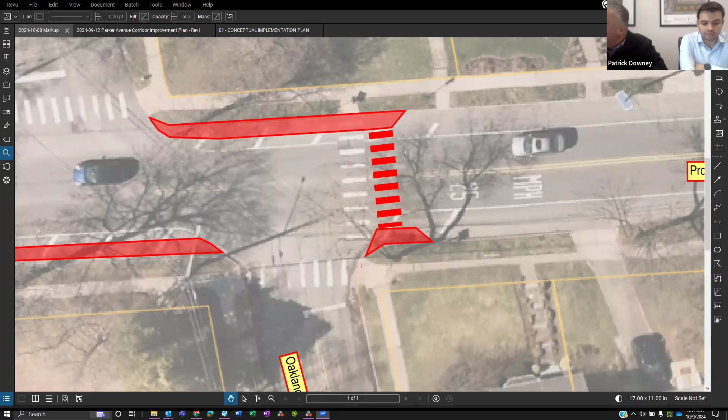John, can I ask you another question about Prospect, since you've done studies on it? At these peak times, am I correct to say that volume of traffic is more of an issue than speeding? Speeds are probably a touch above the speed limit, but there's a lot of cross streets, a lot of turning into and out of, and significant pedestrian activity, which tends to help with driver speed.

Volume is high. It's probably, do we have notes here? It's over 12,000 daily. We keep talking about this because we only have so much infrastructure, and the population in both towns is growing.

So people are bypassing Valley Street and coming on Prospect. Yeah, there's tremendous traffic using Prospect. So it's not as local a road as we want it to be, as it used to be. That's a pretty significant volume, 12,000 ADT, average daily traffic. It's huge for a road like this.

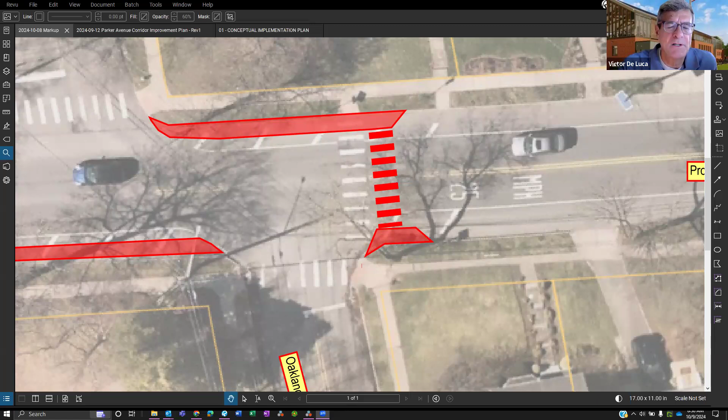But it is a north-south connector. That's right, it connects South Orange with Union, and goes right through Maplewood.

Paul, Patrick, and John, do you want to say anything else about Prospect, on the entire stretch, before we have comments from folks? Yeah, I do, just want to mention one thing.

We did apply for a municipal aid grant for Prospect. We're still waiting for the state to get back to us, but we anticipate getting the grant. If that's the case, we'd be looking at repaving the entirety of Prospect Street, which would clean the slate for any type of design, bike lanes, or pedestrian safety improvements we have in mind. That would basically clean the corridor up so that any new striping would really pop and be more effective.

And when is that? That would be 2026 probably. Probably 2026, yes. Okay, John or Patrick, anything else? No, Vic, I'd be happy to hear from the residents.

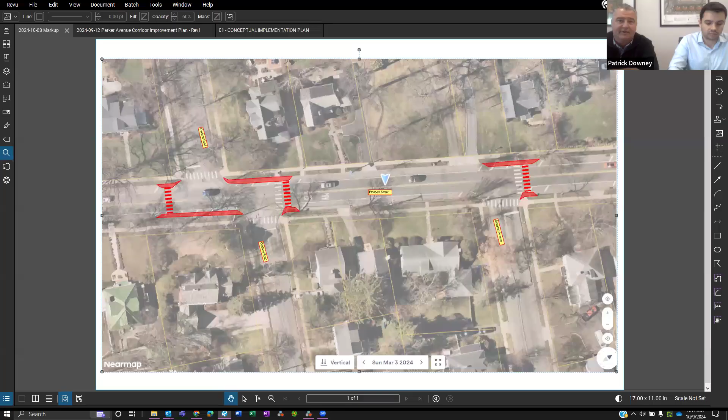If anyone would like to speak about Prospect, and can you get rid of the share, feel free. Hi, this is Vicky speaking.

Vicky Arlene. Quick question: those accident studies that were done on Prospect, were they just since the law changed about stopping for pedestrians in the crosswalk, or did they go beyond that? Because in the case of the children and other people, the assumption is that cars are supposed to stop in a crosswalk. I'm wondering if the study of accidents is all affected by the new law, or if it's just from before the new law, or both, or whatever? Right, the crash history we requested and received from the police department was over 5 years from today, so it includes...

I guess in those 5 years it was always stop for pedestrians, if I recall correctly, but it's not just a 1 year snapshot - we go back at least 3 years, I like to go back 5 years to see that. Now, remember, when we request crash history, it's only crashes that are recorded, reported, etc. So there could be activity happening that doesn't rise to the level of crash reports that the police would have hands on. But that's what we found, and that's what we have to utilize in our justification.

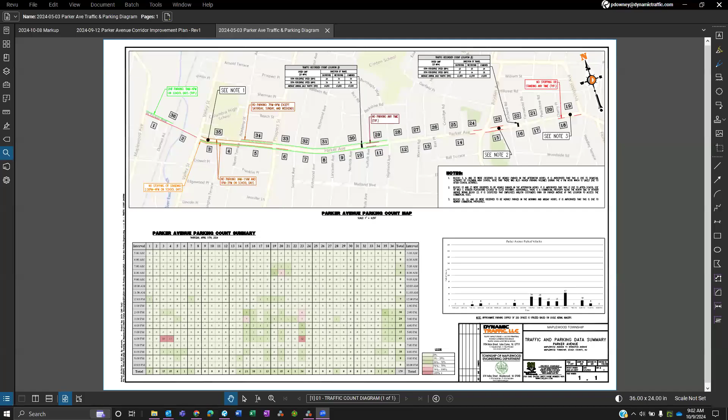Can we pull that plan up, gentlemen? Do you want to just describe the plan? Yep, coming up. Before hopping to the plan, we're just going to walk through some of the background information that was collected.

As was alluded to before, we took a holistic approach at Parker Avenue, specifically with regards to how to bring it into compliance with complete streets policies, and how to make it safer for cyclists, pedestrians, and motorists. One of the key changes being evaluated was the conversion of existing on-street parking to bike lanes. The road is very narrow, too narrow to accommodate both features, so it really is an either-or.

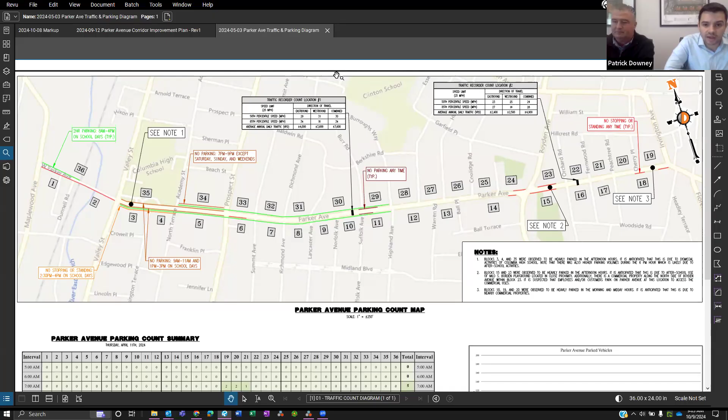We went out and performed parking counts on a number of days, and looked at existing parking regulations. We broke the entire road up into numbered blocks, over 30 of them, and summarized their parking utilization in this table, with green representing low utilization and red representing high utilization. As you can see, while on-street parking is legal in most locations, it's very underutilized. Two main exceptions were at the west end at Columbia High School and at the east end at Milo Borden Park and Playground, where there were a couple of afternoon spikes in parking activity.

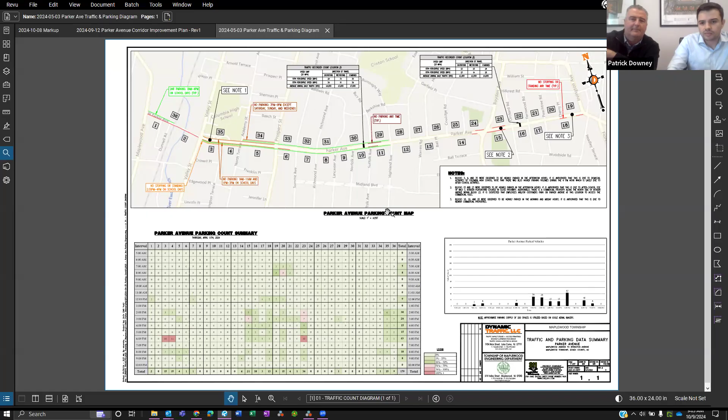Just to show the magnitude, this is essentially the number of parked vehicles over time, with about 200 spaces available in total. You can see the most at any time was just over 40, so only about 20% utilization at the highest time. Based on Parker's location as one of the more continuous, longer streets, and based on the underutilization of parking, this seemed like a good candidate for potential bike lane improvements.

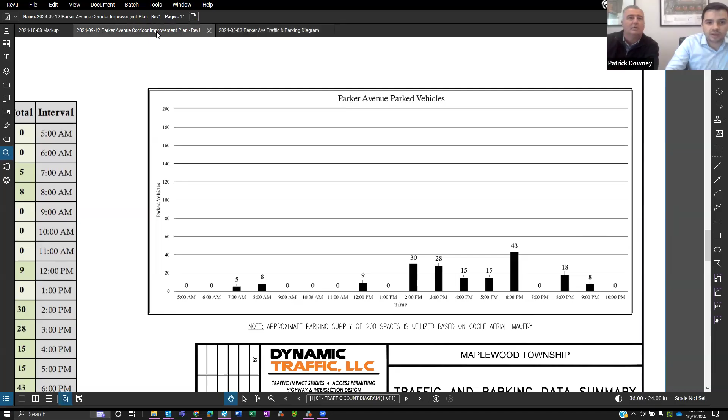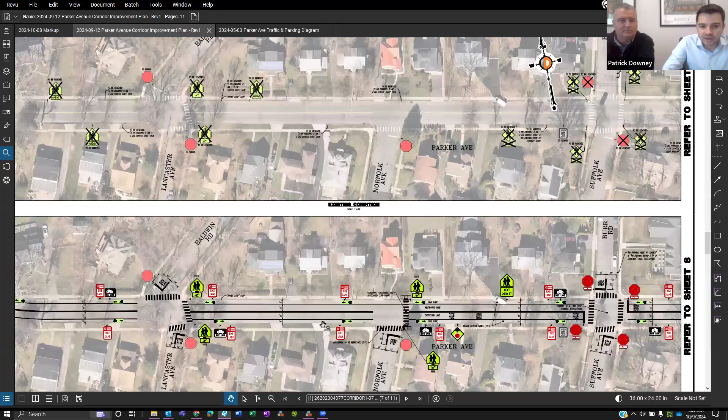What you can see at the bottom is new bike lanes installed with a new stripe separating them, narrowing the lanes down to 11 feet to provide some traffic calming benefit. We're also upgrading the existing LED blinking border signs, which we discussed recently, to new RRFBs—rapid rectangular flashing beacons—and refreshing crosswalk striping, stop bars, and adding stop word markings to make intersections highly visible to motorists.

We're adding crosswalks at intersections where they're missing. In the middle of the screen at Norfolk Avenue, there's a missing crosswalk which would be added. At several intersections we performed individual safety evaluations and looked at potential all-way stop inclusions. This one on the right side of your screen, Burr Road and Suffolk Avenue, was one that rose to the level of warranting an all-way stop. It's a good location within the block too—roughly midway in the span between the nearest traffic signals—so it helps break up the monotony of that long uninterrupted stretch.

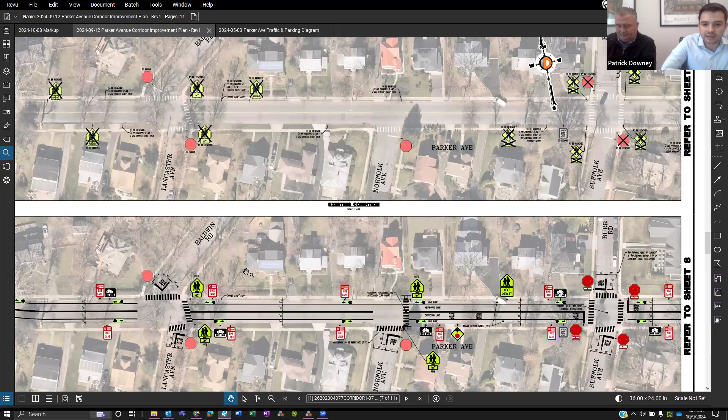So while it's not there for traffic calming purposes, it's warranted in its own right, though it does have some ancillary traffic calming benefits. This gives you a good snapshot of the improvements we're looking to do across the whole run.

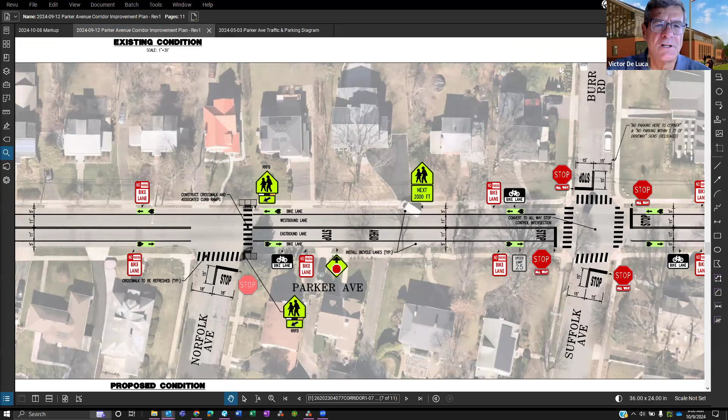So we're not going to go through the whole corridor unless you want us to. Do I, or do you want us to, Mayor, talk about the area around Boyden and Parker? We have the park there and we do get a lot of parking. Yep, what is your plan there? Yep, we'll flip to it—give us a second, it's a big file, so bear with us, I'm sorry.

In this one location, this is where we identified some of the most utilized parking. There's also a retail business on the north side of this block between Boyden and Orchard, so this was one location that deserved a little special attention. I'll move from west to east: we have the signalized intersection with Boyden Avenue, where there are special treatments for how to carry bike lanes through signalized intersections to make sure they're visible.

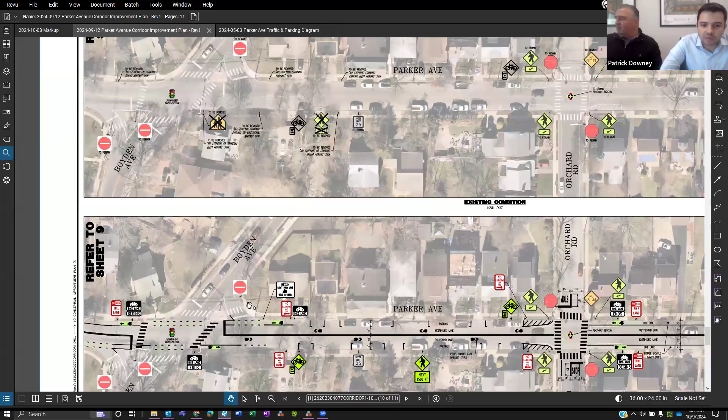You see dashed green bike lane extension markings in both directions. To the east of that intersection, we thought this was a location where on-street parking was important and needed to be maintained, both for the park and for the business. So for that reason, in this one block only, we'll be converting the bike lanes back down to shared lanes—what we refer to as sharrow markings, which are bike lane symbols placed within travel lanes indicating a shared space.

Vehicles need to share that lane with the bikes. Continuing west to east, once you get to Orchard Road, that was another intersection that had some historical issues.

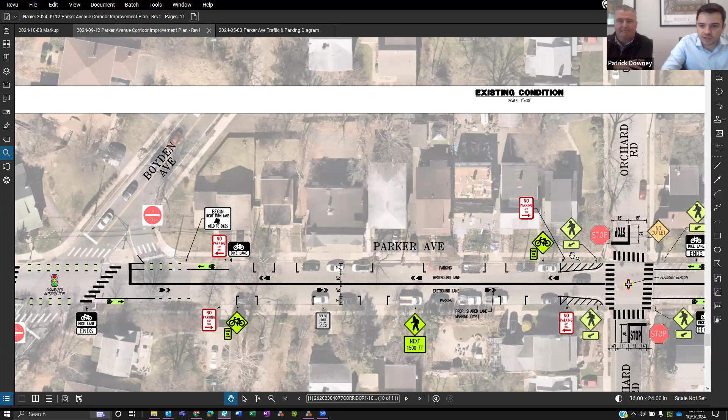There's an existing overhead beacon. We took a look at sight lines and found that they could be improved there. So we were calling for some daylight striping improvements at the intersection, an upgraded refresh signing and striping package for that intersection.

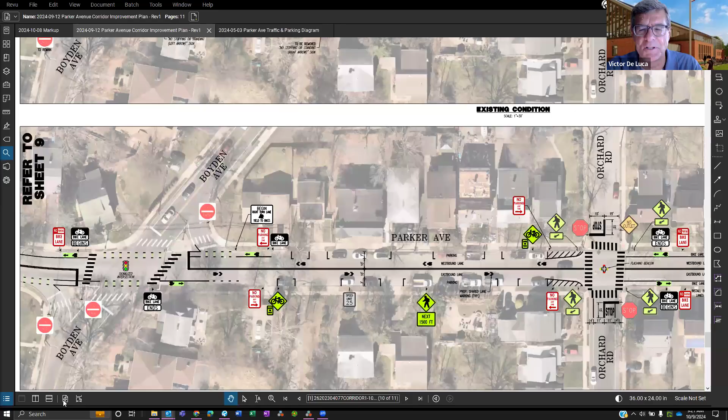Rich? Hi. Okay, I won't compliment you then. I was going to. No, you can do that.

You can do that. After 30 years of being involved at some level looking at this, I'm just stunned and appreciative of this. Just a couple quick comments.

One was mentioned, I think, by the previous speakers. It had to do with the color of the bike lane. They were talking about green, and I was going to make it a question, is what else do you do to make the bike lane look different than the street, and what's in the plans?

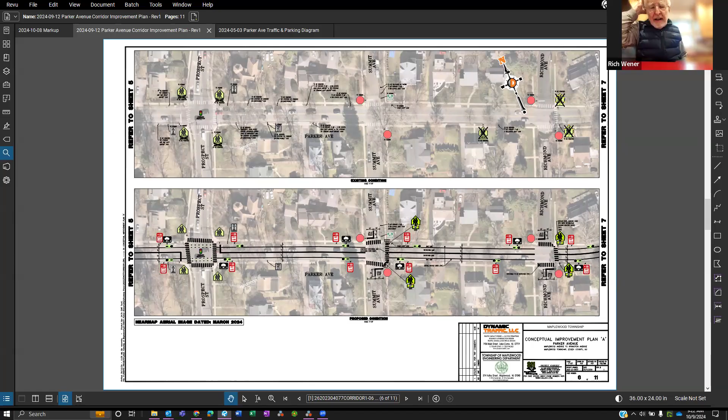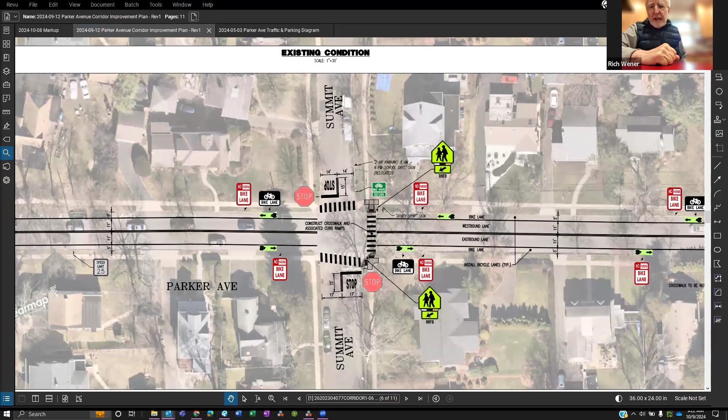Let me just mention a couple other things. I think having these major regular riders comment on this is really useful and great. Obviously, they'll ride anywhere and do. It's the shaky riders that are the key, and that's what you want to really make it feel safe for. I think those are the people we need to be talking to as this gets laid out more. I'm guessing you already have somewhat, but if we could talk to the parent with a couple little kids that are just starting to get around, that's the kind of thing that really makes this work as a large community thing.

The last thing I wanted to say, having a good friend that was hit by a bicycle in Manhattan the other day and is still recovering, I think one of the lessons is that enforcement has to also include enforcement of behavior by the cyclists and not just the drivers. I think cyclists sometimes are more cavalier about crossing a stop sign without stopping when it looks open, and I think there's major risks to pedestrians. I'm majorly pro-cyclist on this, but I think it's a reality that needs to be addressed.

Thank you. Thank you, Rich. Julia?

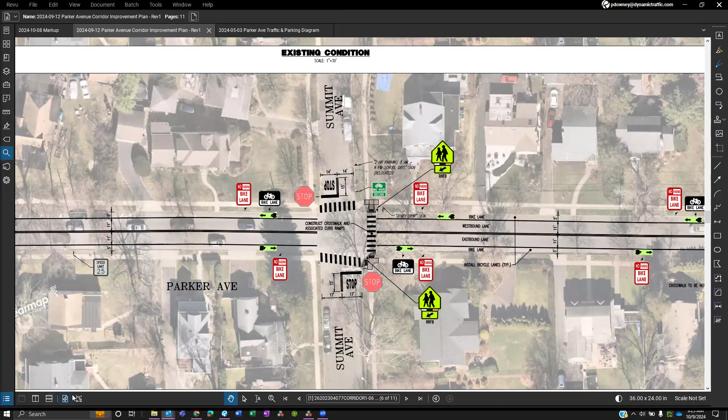Hi, I love to see the green paint here. I want to know if the engineers or administration anticipate that requiring more maintenance than white paint, because South Orange is painting two bike lanes this year and requested to use green paint for safety, but they were concerned about keeping green colored paint on hand and the frequency and expense of repainting. So I just want to make sure the town has a plan to maintain the green paint, and also share with South Orange that it's a good idea to have a consistent look of our bike lanes across the two towns, since we're just starting out with this.

My child goes to Clinton School, and like you're saying, it'll be great to get public feedback from the communities that frequent this area, and the Clinton population. I'm sure we'll have a lot of feedback, in particular on the multi-way stop at Burr. It would be interesting to understand a little better the choice of Burr rather than Burroughs, since Burroughs is the highest point in the road and where there's a crossing guard already stopping cars, and then they'll have to stop again a block later at the 4-way stop. Not to say that's necessarily a bad thing, but just making sure everyone's aware that's the situation, and that Burroughs is the one that leads directly to Clinton School, whereas Burr is more of a side street, not directly leading to the school.

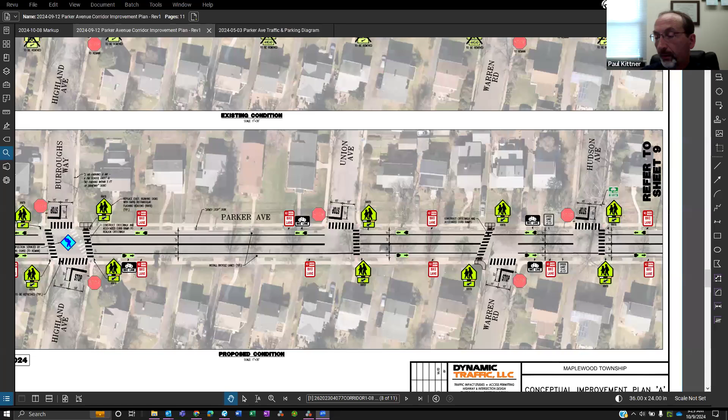Then it would have to get out to bid. So we're talking about this work probably next year at this time, or maybe a little sooner. I think that's fair. The ideal time to do it would be summer, but I don't know if we could commit to that. We're probably looking at the fall.

Right. So to answer your question on staging, could we do one thing first? I think we have to go back and take a look at that—that's the answer. It may be something we can do sooner rather than later, because the four-way stop, if it's warranted, I don't know if we need to wait to have the whole package together. That's something we have to discuss.

Okay, anyone else? Jesse, I want to go back to you for a minute. What do you think the reaction is going to be from any of your neighbors about no parking on Parker?

I would agree with the sentiment before—I think Martin said most people don't park on Parker because it is kind of scary, cars are racing. We had a contractor working here years ago who actually got clipped by a car as he was exiting.

The issue, I think, will be things like FreshDirect trucks and UPS vehicles. We do get deliveries, so I'm not sure where those trucks would go unless standing is allowed, or even like, oops, we forgot the kid's backpack, so we have to run in really quickly and not pull in the driveway. I don't know what kind of rules surround those things, but there's a lot of deliveries and it's a really heavily used street, so that would be my concern. I do support the bike lanes, totally fine with no parking—I think people will adjust.

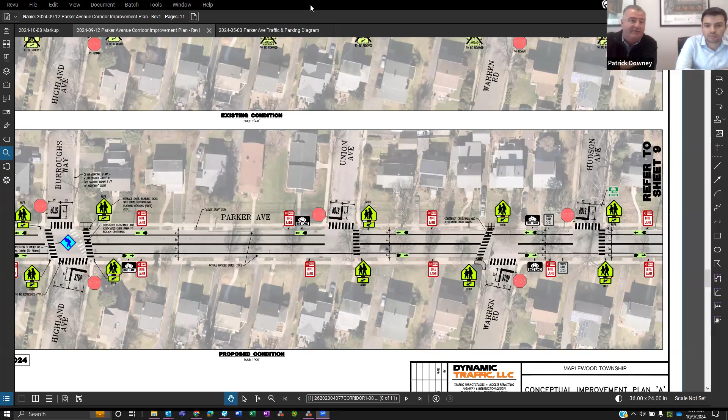Yeah, it comes down to enforcement, how often, and the town's preference, to be honest with you. You're not supposed to stop in that lane, whether you're running in for a pizza or an Amazon box. You're right, there are a lot of cross streets—we figured residents would get used to it and guests would park on the cross streets and walk a couple of homes up. Then it comes down to the town's preference as to how strictly those things want to be enforced.

Okay. Rob, you spoke a lot today—you have anything new to say? I have a question, a follow-up on some of your comments in particular.

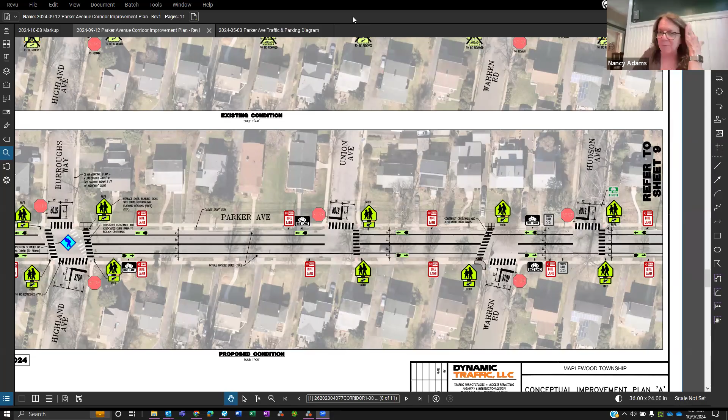It's like over the course of these discussions, on-street parking is referred to as almost precious. The data says it's not very used. To what extent do the town committee and engineering's deliberations consider that people on Parker and Prospect have driveways? How does that factor into how precious we view the parking when there's already off-street parking? It depends on every street. We talk about it with every street. Some streets, like the Hilton neighborhood, have very short driveways, and sometimes more people live in them. So while we want to make complete streets, we can't negate the fact that people have cars. We have to consider everything, and it's not an easy balance.

So just in this picture, you see stacking of cars. If the inside car has to get out, it would require two people to maneuver, as opposed to one person pulling out the first car, parking it on Parker, and then getting in the second car and pulling out. So it creates some difficulties for folks, but generally we try to preserve parking in front of people's homes. This is a major difference.

Cynthia, we haven't heard from you. Hello, so we're on Orchard and Parker. We wouldn't have a bike lane on our block because of the park, the playground, and the business across the street.

I am all for no parking on Parker. I live on Parker. If we have visitors, they can park on a side street, we can figure it out. We have a small driveway.

So my question is, you mentioned this needs to go through multiple stages. Does this need to be approved by the residents on Parker only? Does it work like a percentage? I'm just not sure how that process works.

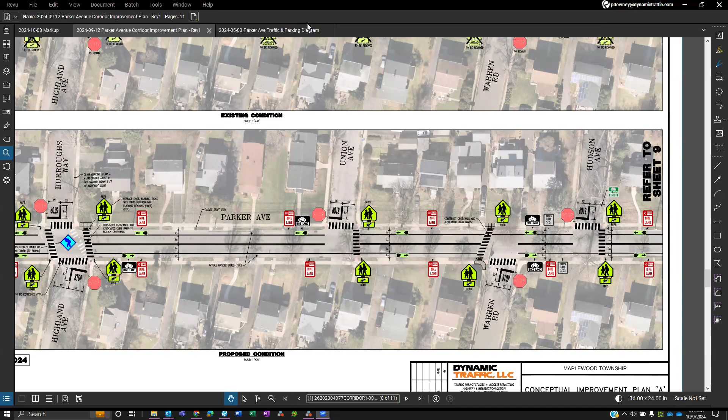Okay, well I do think it's a step in the right direction. I'm excited anytime I see a bike lane, especially now that we have a lot of schools ramping up and getting bike buses going to school. So like I said, I'm hopeful. Thank you.

Jesse, your hand is up, did you want to say anything again? No, sorry, that's all, okay, I didn't mean to raise my hand. Okay.

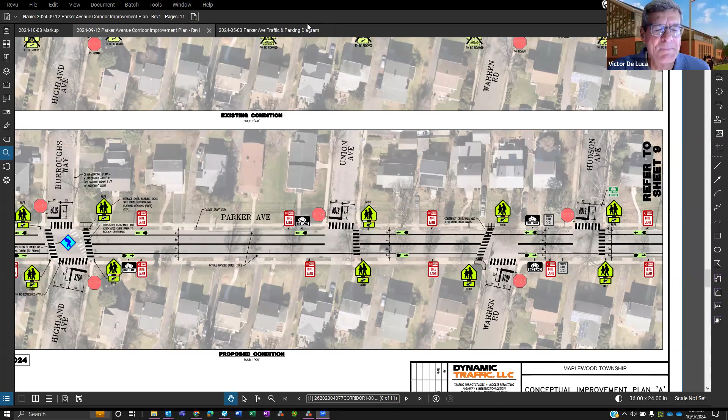All right, anyone else want to comment? We can take this screen down, Patrick. Thank you, let's put some people back up here. Okay, man, we still have a lot of people on this meeting. We're going to sell tickets next month. Yeah, they'll drop off during the boring stuff coming up. Oh yeah, well there's a lot of boring stuff coming. Well actually, no, the Greenway is coming. So we're going to leave it at Parker.

I think Patrick, John, and Paul, you got some great feedback here. Take a look at this again, see if you want to tweak it at all. And then, Mayor, my thought is we're going to have to set up community meetings, maybe in sections, because people are going to want to know what happens in their section. Yeah, so we'll talk about scheduling that and going forward with it.

I'd like to thank everyone for their comments. There were some really good suggestions, and I think there's a lot of good suggestions in the chat box too. We're going to make sure we copy those and take a closer look at that as well.

So thank you. Julie, I hesitate to have you speak because we want to move on, but can you be quick? I have to go. So I don't know if there's new stuff coming that I haven't seen already, but if someone can maybe fill me in after this, I have to get to work. Okay, yeah, okay.

So the next thing for anyone interested in biking, the next piece we're talking about is really a connection to this, and that is the Greenway.

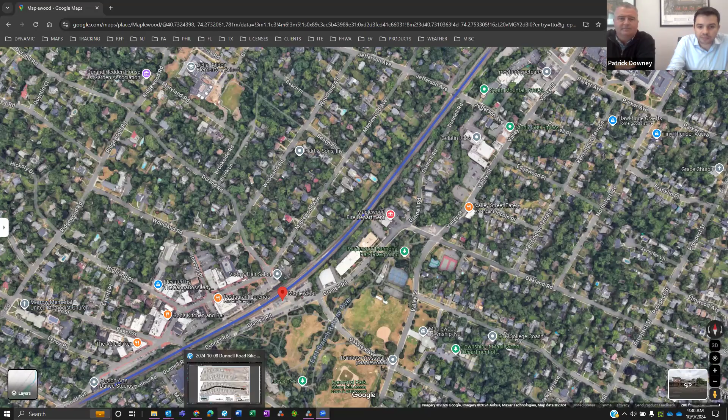The interesting component of this design is Dunnell's much narrower than Parker was. So we need to make these lines dashed in the same way that, on a conventional residential street, between on-street parking on both sides, the 2 directions of traffic need to essentially share the middle section and swerve around each other into the bike lanes when 2 are passing at the same time if there's no bikes present. It's really the best treatment you can do with the very narrow cartway that we're working with here.

We did kick around the idea of shared lanes here, given the narrow width. It's one of those things where we do it when we have to, but it's never our first choice. This seemed like a good option to provide an actual formal bike lane that would formalize that condition a little bit more for driver awareness. Now, Pat, just so we're clear, I'm sorry to interrupt - this treatment is actually almost an experimental treatment through FHWA, right?

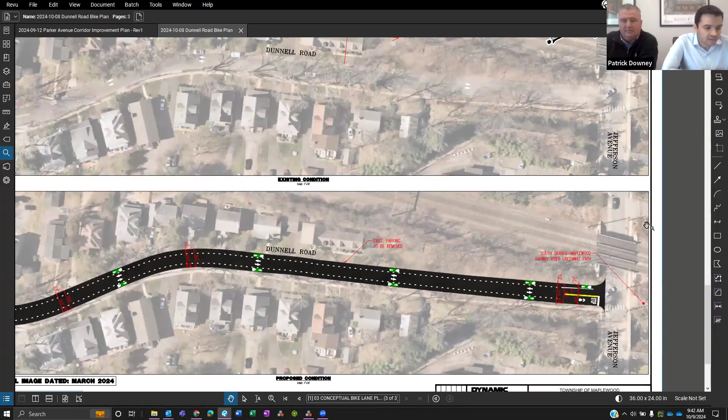Correct, so it's a treatment recognized by FHWA. It's still rather new, I'll call it cutting edge. For places implementing it, they want you to submit the location so they can monitor it, and at the end of the day it's subject to their approval. If they're not okay with using it in this location, we could modify it to a shared lane marking, since that's a standard compliant operation. But subject to their approval, we think this would be a better option, so that's what we would pursue.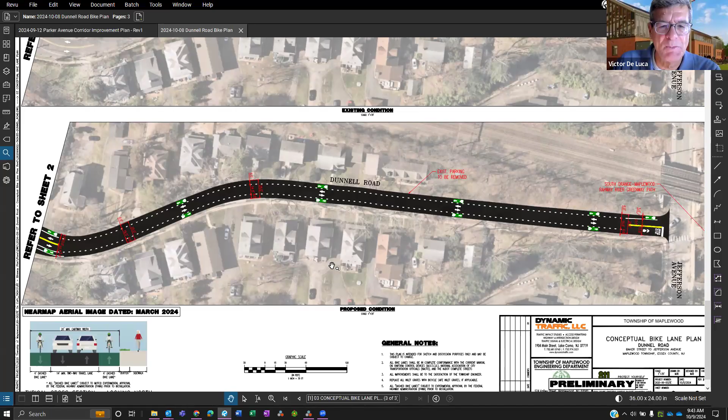One other thing to point out: the parking along the top side of Dunnell would be removed in this plan. This is the one segment of Dunnell that would experience a loss of on-street parking. How many spaces are there? About 8 or so, but that's just for commuter parking - from the houses to the right, to Jefferson. Then there's parking in front of the homes, which is also allowed.

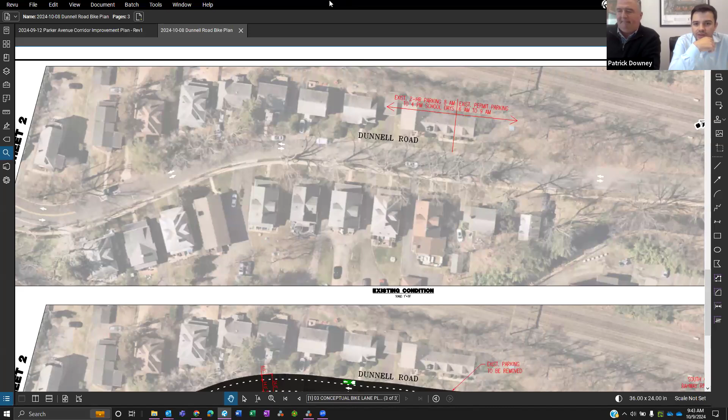Yeah, so you can see there's a 2-hour parking restriction on the southern two-thirds of this block, 8 to 4 on school days, and permit parking during the morning north of that section. So it's really trying to gear this section primarily for residential use, as opposed to further south.

Just so we're absolutely clear here, this is a bit different than our last meeting when we talked about Sharrows, but we have not had any conversation with people on this block about eliminating parking. Which is different than Parker, because there we've had a series of conversations with people, so they understood things might change. So we are eliminating commuter parking for a lot of people who might be living up from Jefferson, coming down Jefferson, making that turn and parking there for the train. Those are our residents that have to move. And then, of course, the residents on the street won't have parking. So this is going to be a bit more complicated to maneuver as far as getting community buy-in here.

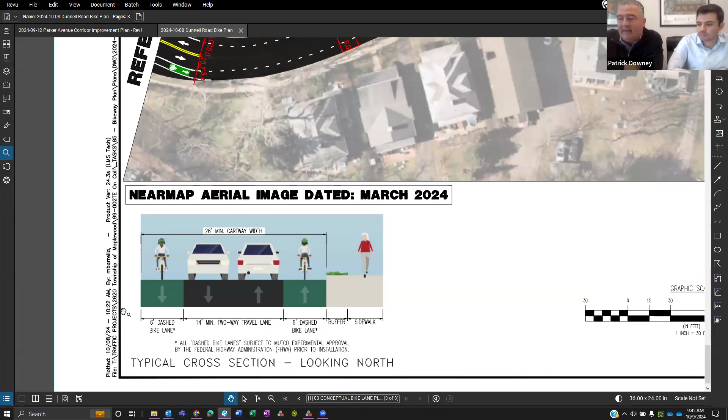But if you look at this segment - and I won't belabor it, we'll jump to the next - it's very narrow. We know that Sharrows or shared lane markings are a fine treatment where absolutely necessary to combine or link lanes. But we think this length of road really deserves a full bike lane treatment. So we're trying to make everyone happy here, leaving vehicular traffic enough room to maneuver, while indicating that when they need to, it's acceptable to utilize the width of the road.

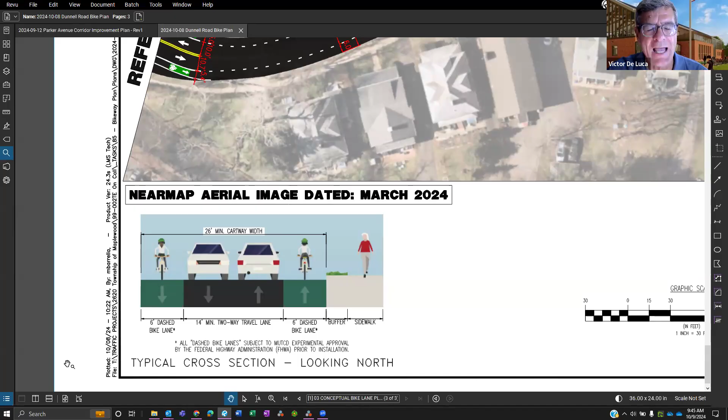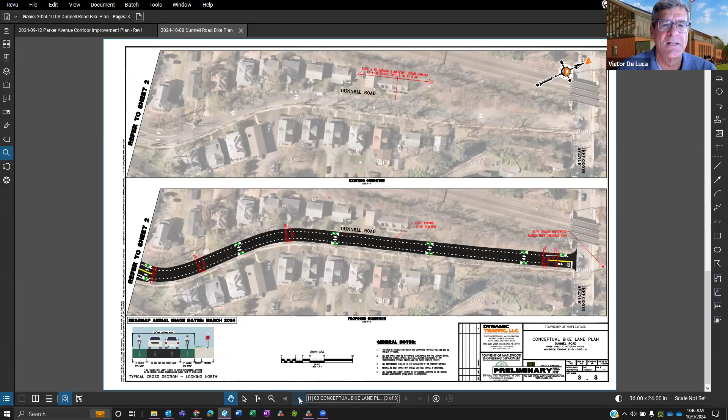So with that, let's jump to the middle. Just one other thing I want to make clear, because I don't want someone to say why don't we make this one way - we've had conversations with the fire department, and they need two-way access here. We also need access from Jefferson to the train station, so people coming east on Jefferson can make that right and go south towards the train station. But the fire department also needs to go north on Dunnell to get underneath Jefferson to access that area. I invited the deputy chief to join us today, but he had training, so we do want to sit down with him to explain all this. Yes, thank you for bringing that up.

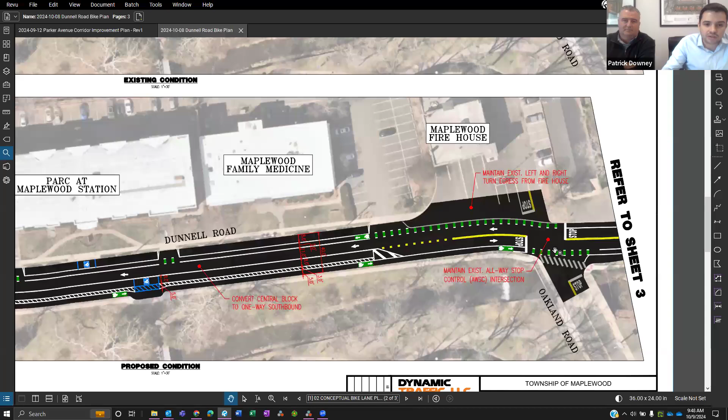It then again reaches the all-way stop where it can go wherever it needs to go in a traditional manner. So it's a bit of a unique block here that we have to work with, but this is in compliance with the latest design standards for bike lanes. It seems like a very good application, given the need to maintain on-street parking and the fact that the door is already partially open to one-way southbound based on what already exists in front of the train station.

Yeah, I have real concerns about traffic coming from Valley to up Oakview toward Dunnell and turning right. And then there are businesses over there— I'm sorry for my dog, can you shut the dog up— businesses over there by where it says Nelson's, and then there's offices in that whole office, but I don't know, I have real concerns with what that does.

So I would need to see some sort of traffic analysis with people coming off Valley Street, and a lot of people turn off Valley Street to avoid Valley Street and go Oakview to Jefferson, and then take a left on Jefferson to get up to Maplewood Avenue.

This also—at least now that more people are finding parking on Dunnell or Maplewood Village—they come from Jefferson and turn onto Dunnell, and get there that way, then park along the train station. So there's some circulation there that might not be intuitive, but it's something that I do and I've witnessed other people do.

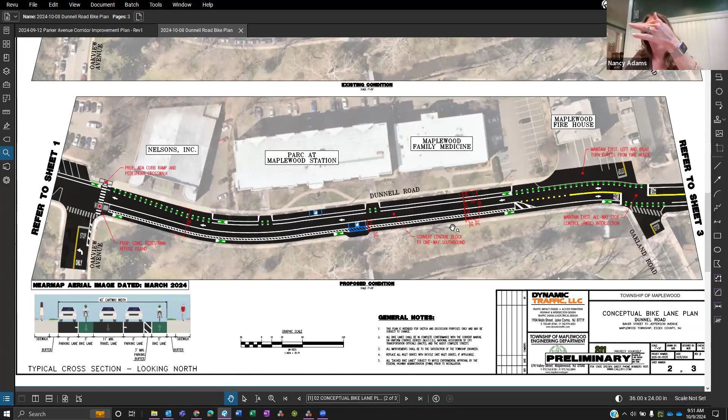Right, there's no doubt, Mayor, that this needs to be analyzed at like 4 or 5 corners around this potential one-way to identify the redistribution of traffic and what that means. There's no doubt. And there's also the Y, the firehouse right there as well, so drop-offs and things like that, people coming down Oakview and hanging a right, pulling over, dropping off their kids at the Y and stuff.

Okay, while we're still on this page, do you want to jump to the crosswalk there? Or is that the next thing?

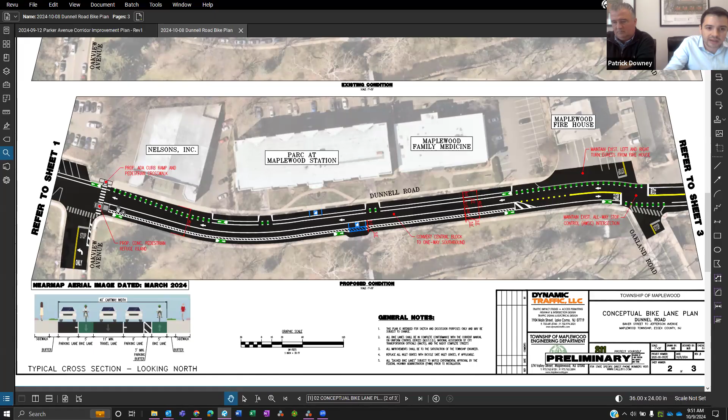So Oakview Avenue, that intersection on the left side of your screen is kind of the transition to the next block. But to touch on the intersection itself, in addition to making Oakview Avenue a left turn only if that one-way were to come to fruition for this block, we noticed there's no crosswalk provided at this intersection, which typically there would be—it's where drivers expect crossing locations. So we'd show a potential crosswalk added on the northern side of that intersection, shown in the brighter white proposed striping. This also allows you to provide a physical island to help protect that parking lane and serve as a gateway entrance to this northbound bike lane.

I think Mr. Howley has a question. Yeah, we're gonna wait, Paul, let's just get through the whole thing first. Okay, I'm sorry. No, I got it.

All right, flipping to the southern block. This block is a little bit simpler. It's much less substantial of a change than that block we just discussed.

We're right in front of the train station. There's a lot of parking provided now, angled and parallel. It's all at a premium, it's all heavily used. So in this location, there's a wide, 15+ foot travel lane existing between the rows of parking. We would just be striking a line down, striping out a formal bike lane and a formal travel lane within that space. Does that bump out that we put in 5 years ago or so affect the width for cars and bikes?

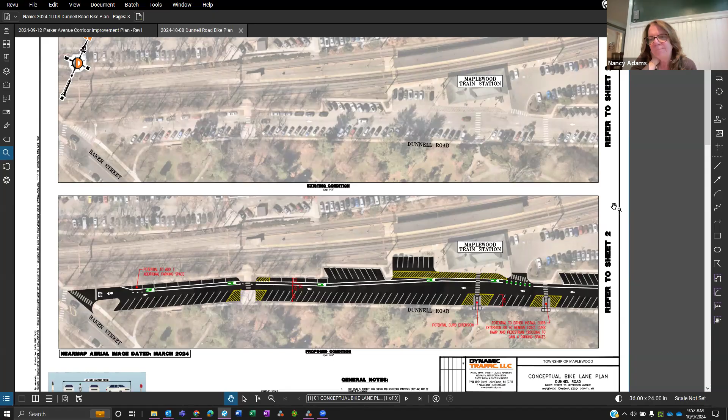Yeah, so that's the tightest location in this full stretch. If we could go back in time, I might offset that a couple of feet from what it is today. But it's there, we can work with it.

One thing we did show in regards to right in front of the train station, there are 2 existing crosswalks that do not have those bump outs. There's 2 things really to talk about with those. Number one, there's the potential to add them. They are still a beneficial treatment, not quite as large as the existing one. But additionally, between the one at the front door of the train station and the one potentially to be added at the intersection, just right off the page, I think it's worth discussing whether we need this crosswalk that would be right in the middle of those 2. If it were to be eliminated, it might simplify this whole stretch, and it would provide the benefit of adding a few additional parking spaces in that existing striped area. So that's a potential option on the table as part of this improvement.

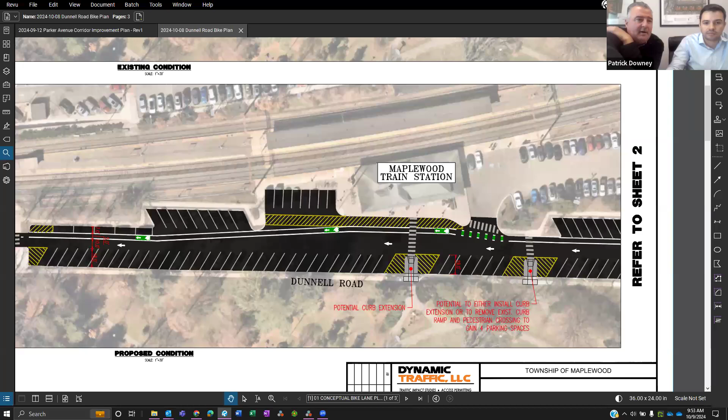And Mayor, just to answer your question, if you zoom down there, that area is very tight, and you'll see this is an area where, because it's only 100 feet, we would look to do some type of different treatment, marking, striping, dashed, something to that effect. So we don't lose the whole bike lane because of just that one little piece, but we would absolutely have to look at it a little bit differently.

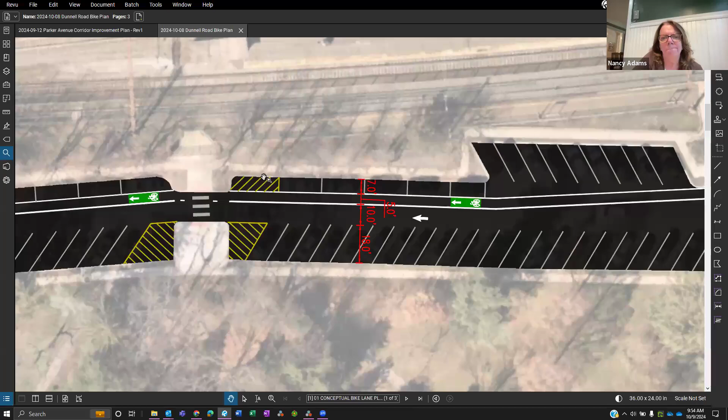And that's it in a nutshell. That's as far as we've gotten on the connection for the bikeway down to the trains. As you said, there's a lot that needs to happen for everyone to feel comfortable, Mayor, with that. But we welcome any questions on the design.

So this block has no return lane, correct? Yeah, so in the central section, there was width available to maintain that bike lane on the opposite side of the parking, as I described earlier. In this section, due to how wide those angled parking spaces are, you don't have the same amount of width to work with for northbound. So the block is currently one-way southbound for vehicles only. It would continue to be one-way southbound for vehicles and for bikes. We didn't want to not provide the southbound bike lane simply for the sake of not being able to provide the northbound. We want to provide the one that we can in the same direction as the vehicles.

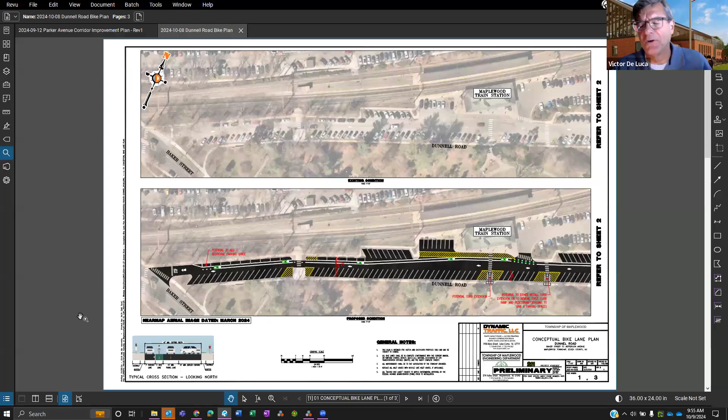No, I just want to say the last two slides, I don't think there's a reduction or loss in parking. I think it was just the first slide. Correct, we actually talked about the loss in parking. You're correct, there's actually the potential for a small gain. Right, there's a loss of about 6 to 8 commuter spots, and then whatever the residents use. Some of those driveways on the west side are fairly narrow, so we'd have to really have that conversation with them.

All right, Rob. Hey, Ian. First of all, thanks for fielding all my questions. On any given month, I'm probably threatened by more drivers than will use any of the parking spots we discuss. So improvements in safety, really appreciate.

As for the bike lane coming, I think it's by the stores right before the train station, is there any reason why only one side is parking protected? Why didn't you go parking protected on both sides? Because as designed, it's currently in the door zone. I'm familiar with the term. Someone opens their door, hits the bike. It's terribly painful.

So like when there's a door zone lane, it's safer to just not ride in the lane at all. This would be the rare instance where I'd say the bike lane is doing more harm than good, unless there's a way to switch it and have both sides be parking protected. So I'm curious about the thought process there.

Yeah, good question. A combination of factors. Again, it would require an additional buffer when the bike lane is on the inside of the parking lane. There's an acknowledgement that they can hug their left line a little bit more to avoid door swing, so there's not the formal striped buffer required. It's certainly beneficial if you have the room to provide it, but it's not required in the same way it is for the northbound contraflow lane.

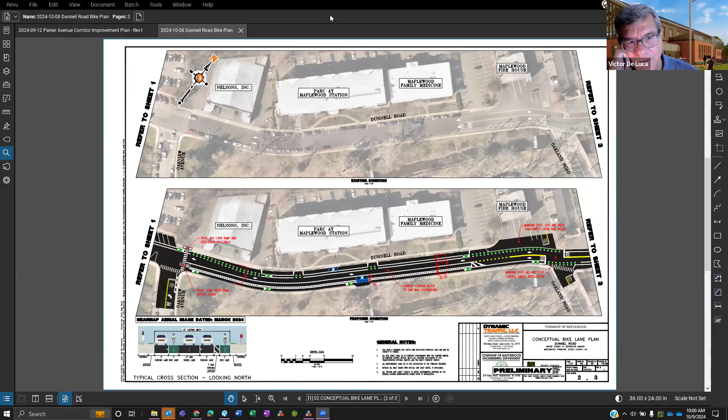And I'm wondering why parking is such a priority here. Take a picture of all the overused bike racks - I use it often when I go into the city. There's plenty more bikes and people going to the station that way. Why do we need cars to be unused using that space all day, 24 hours? Is this something the town can actually visit and not prioritize parking here? I think almost anything that is permitted parking is pretty much unnecessary. Are you talking about the train station parking? Yes. Okay, well, that's a priority for us too, so that's an equal priority here.

So, okay, thank you. Julia? Hi, thank you, I appreciate that you have these long meetings to go in depth. Regarding the Greenway, this is related to Parker. I also wanted to point out that the design is missing the crosswalk that still needs to be installed at Buckingham Terrace Parkway, connecting the Chiswick Field driveway across Parker Ave. So, wherever that design lands, whichever plan it's in, just reminding people that still needs to be done.

And then, yeah, same concern about the one-way bike lane in front of the train station, because currently bikes are going the wrong way on that street, because it actually feels safer than going all the way around and onto Valley.

I think also, bikes would continue going the wrong way on that street, even without a two-way bike lane. So that's something to consider. Especially with one of the goals of the Greenway being connecting both middle schools, with the intentional integration plan, there's more kids from Maplewood going to South Orange Middle School and vice versa.

Thank you. Rich? So on the issue of, can you make all of Dunnell one way? And out of my total ignorance, are there any designs with emergency lights or flashing emergency lights that allow a fire engine to go the wrong way up a one-way street? Is that done ever, or is that crazy?

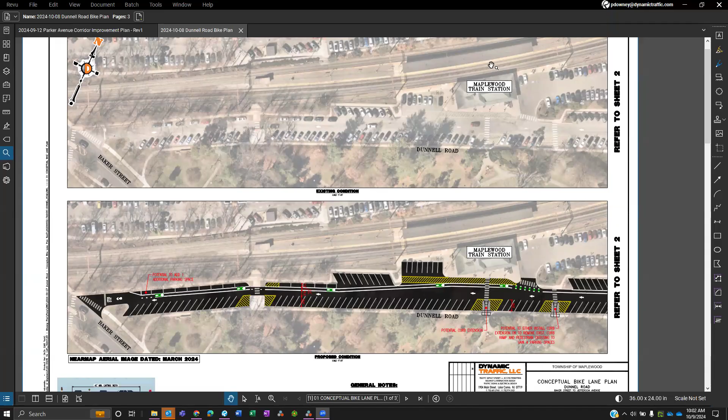Vic, you're gonna let me answer. Rich, thanks for the suggestion, but the fire department's never going to sign off on that. Well, that's what I said. No, I didn't know. I was wondering if there's any option going on to that. We're not, our lawyers would tell us that we're crazy to take on any kind of liability like that. Okay. Thank you, everybody.

We're going to move on to other items.

Let's see, okay, the Black Lives Matter painting on Springfield. I'm just thinking, I don't think we need John and Patrick anymore. Is that right, Paul? I think we have everything well covered. Did they have anything to add on Tuscan Street traffic calming?

What do you got? We have information on it if you'd like to hear it at this point. Well, Paul? No, let's hear it. I did have it highlighted. So yeah, Tuscan Street traffic calming.

So I can just summarize. I think it was last year we collected data out there in June—speed, volume, et cetera—in response to a traffic calming request that came into the town. What we found at that time was the 85th percentile speed, which is one of the benchmarks for evaluating such things, was about 29 to 30 miles per hour, so 4 to 5 over the 25 mile per hour speed limit. Based on that, some signing and striping improvements were done to the road, but it didn't rise to the level of warranting speed humps at that time.

Since then, about a little over a year later, we were asked to collect new data to see the effects of that improvement, just to evaluate the current need for more substantial improvements. We're finding 85th percentile speeds now of about 27, so about a 2 mile per hour reduction from before. We also like to look at the outliers to see what the change was for more severe speeding. Previously, we had about 12% of vehicles traveling over 30 miles per hour. That number's dropped to about 4% in the past year.